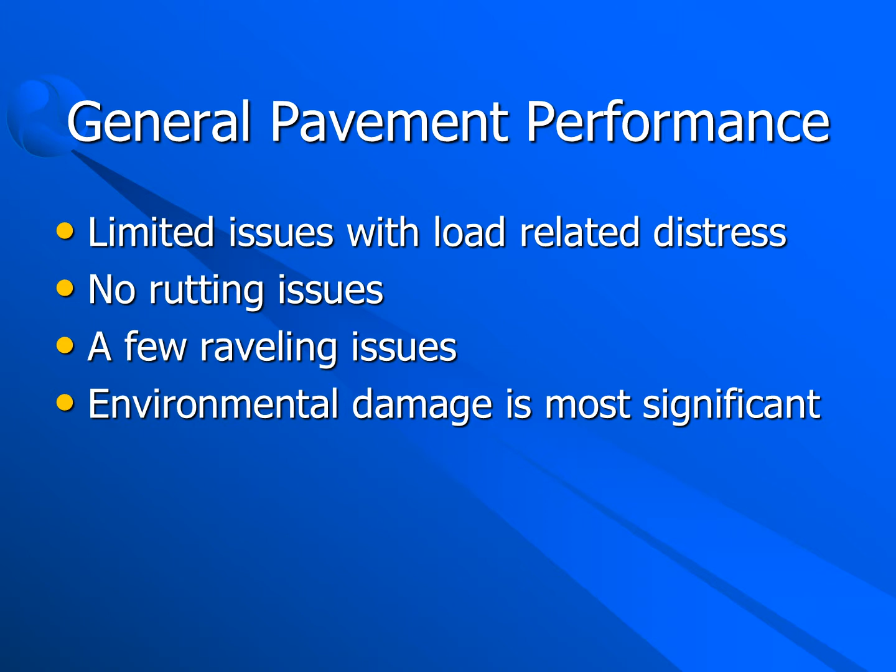So to give you a flavor of what our pavement structures would be, generally speaking, a thin lift of asphalt, 3 to 4 inches thick, over 8 to maybe 10 inches of base. That would be a pretty good pavement section for us. If we have to deal with frost heave, we'd have non-frost susceptible materials much deeper than that. But that would give you a little indication of the type of structures that we have.

So because my office covers a wide range of states, over the course of our performance with binder selection, we would try and match the binder system that is utilized in the state. So for example, if we were back in the 70s or 80s and selected a binder for Mount Rainier, Washington being an AR state, AR 4000 or AR 4000W would have been our typical binder selection, because we'd want to match what the local agencies had.

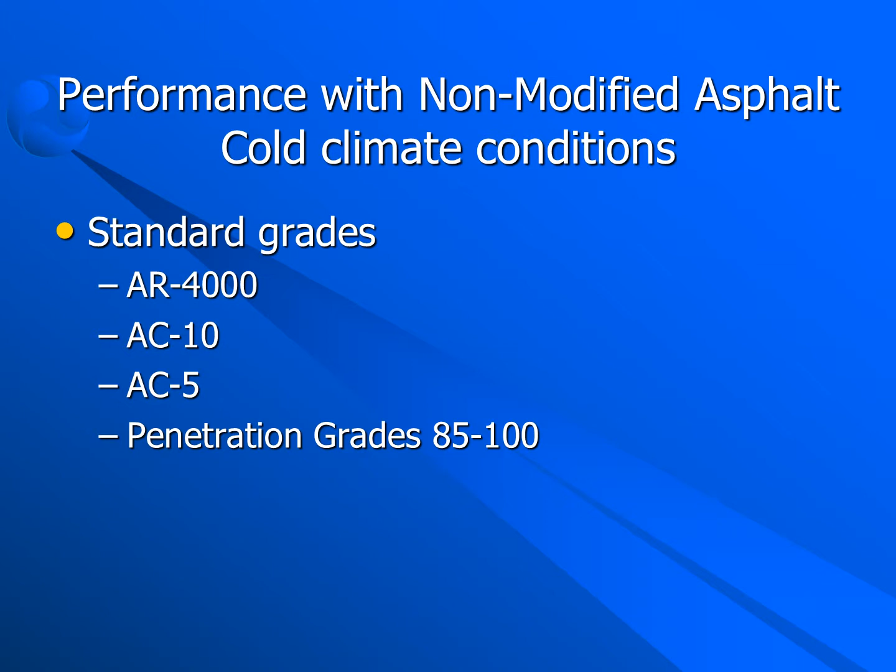So I'm just giving you kind of a rundown of the binders that we would have selected in some of our colder climates. AR 4000 and AC10, AC5 in our really cold climates, those would be what we would select. Montana was a penetration grade state, so 85-100 was a typical selection. We might have gone a little bit softer in some isolated instances, but these would have been our workhorses. So let's take a look at how they performed as recently as the late 80s.

The reason why we got involved, this actually had access to the Ochoco National Forest, so that's why we were involved.

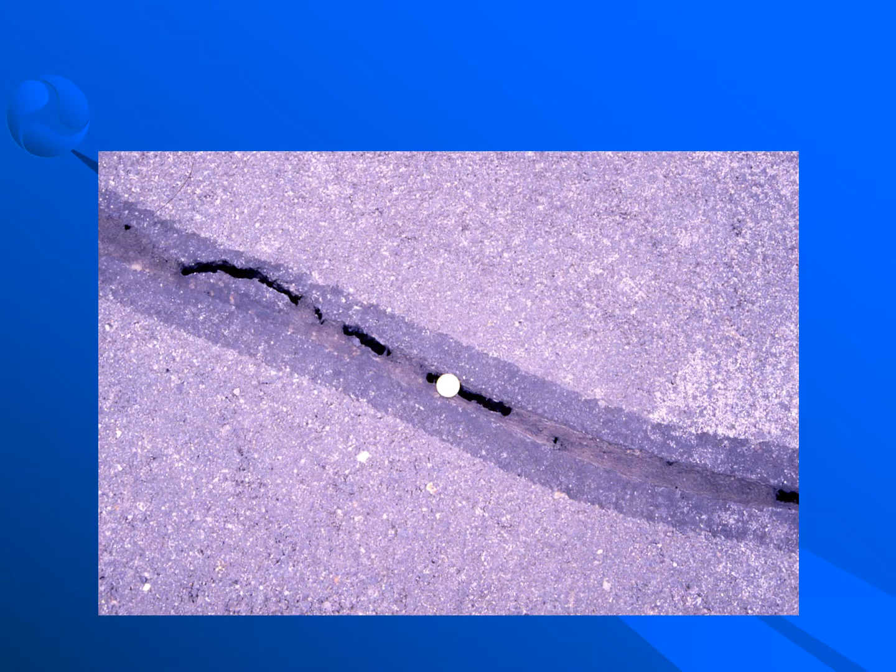And so this is how we would see the crack initiation from a thermal cracking standpoint, then environmentally drives the performance of the pavement. This would lead us to water infiltration, obviously occurring at the crack location, could lead to frost heave issues around the cracks, which would lead to faulting of the cracks, more breaking of the pavement, those kind of things. So that's why I say environmental conditions would primarily be our driver.

So that gave us kind of just one project, but general history back in the 70s, 80s, that's what we would see. So our history of modified binder use really started in the late 80s. Charlie talked about Nevada using AC20R. That was one of our first modified binders, was an AC20R. It was used on selected projects. So we selected it on projects in Yellowstone National Park, Glacier National Park, Grand Teton National Park, very specific for looking for pavement performance, because it was really unknown to us as what to expect.

In the early 90s, we went to a PBA system that was from the West Coast User Producer Group. Joe Duvall talked a little bit about that this morning. And so the PBA system was a performance-based asphalt. It was the precursor to the SHRP and Superpave days, but it looked at binders that would then be used for specific environments. And so we used PBA 6A based on those specifications.

We had a small nuance. That's where the little A came from. In the Pacific Coast Conference, the binder was actually graded as a PBA 6. And currently we use PG binders, very similar to what the gentleman from Minnesota was just talking about. PG 58-40s and 58-34s are prime selectors for our cold climates.

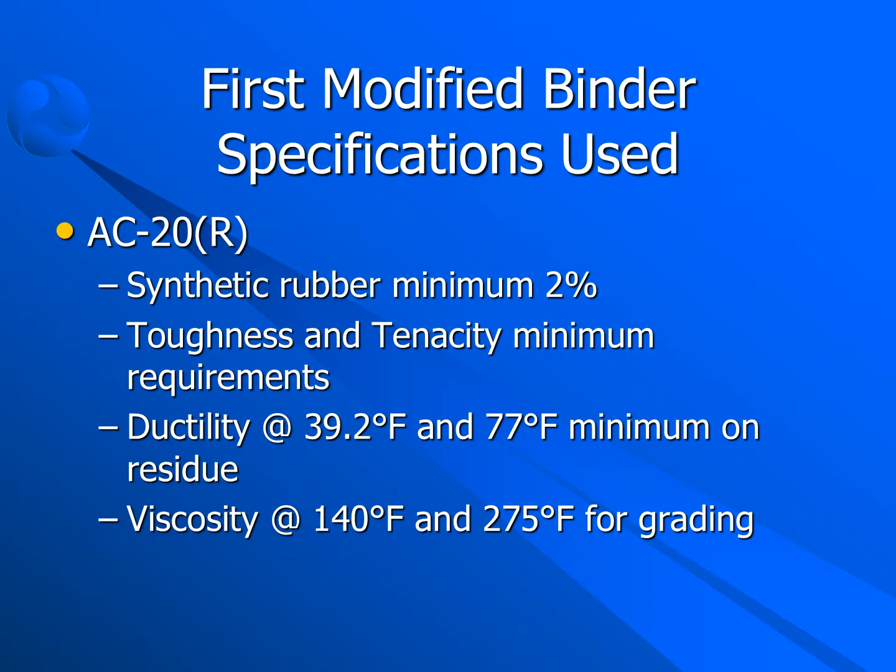So first modified use, just a general indication of where that specification was. I'm not going to go through the gory details of it, but synthetic rubber, 2% minimum. It had toughness and tenacity minimum requirements, a cold temperature ductility, and then viscosities at 140 and 275 for the grading purposes. That was kind of the basis for the AC20R spec.

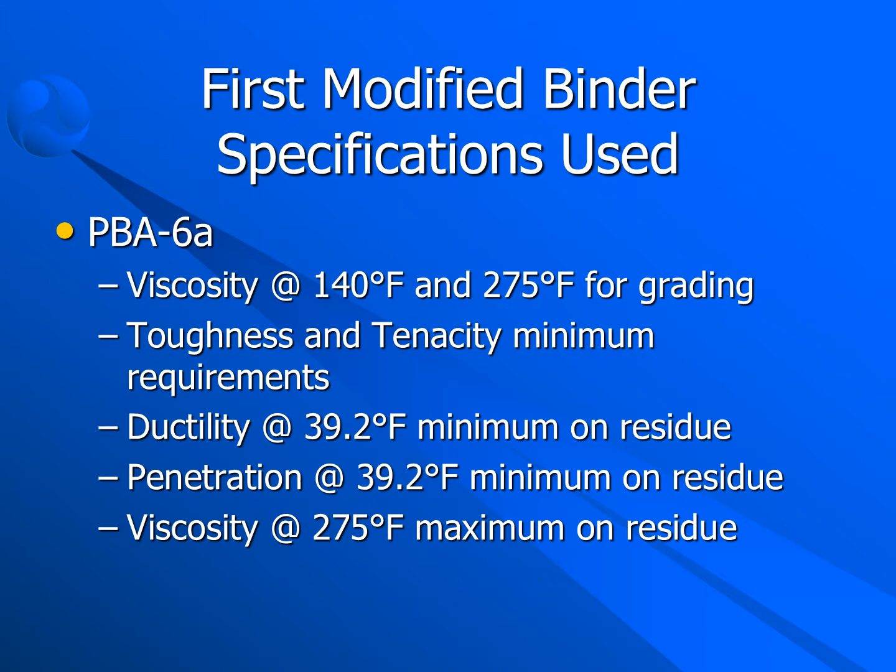Just to give a comparison to our PBA 6A spec. Very similar toughness and tenacity requirements for minimum, cold temperature ductility, but the added nuance that really came out of the Pacific Coast Conference was the cold temperature pen. And not to get into too much detail here, but that also led into other discussions within the Pacific Coast, just in regard to the cold temperature penetration testing, the repeatability and reproducibility of the test. But I would say still effective in getting us softer binders, modified binders that improved our performance.

So let's take a look at some of that performance. West entrance of Yellowstone National Park, it was a PBA 6A modified asphalt, average low temperature, again, off of LTPPBind of almost minus 39, minimum temperature minus 45. So again, very similar to the gentleman from Minnesota discussing the cold temperatures in the northern Minnesota range. We see those as well in our national parks in these colder climates. This was paved in 1993.

Just a quick snapshot for those of you who don't know where the park is. It's up in the northwest corner of the state of Wyoming, so we have the borders of Montana and Idaho right with us there. Yellowstone National Park and Grand Teton National Park are tucked up in that corner.

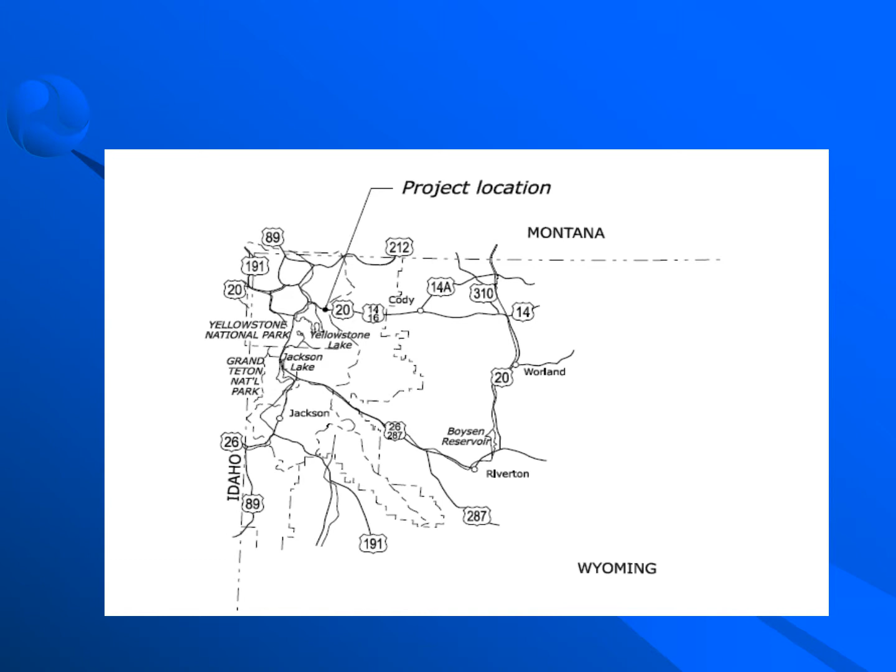And so I would say that the maintenance organization for this would be Yellowstone National Park themselves. They have a maintenance crew. They would be the ones that would take over the maintenance responsibilities after we would construct it. So not severe enough that they've even crack sealed. Again, just good uniform pavement. We saw great performance using this modified binder.

They've done some chip sealing on it. They've done some crack sealing on it. Still performing very, very well. And again, I attribute part of that to material selection in the mix design process, but also the selection of a modified binder for it.

This project was the one that really pointed us to the use of modified binders and how that works in regard to environmental damage. This was East Side Highway in Grand Teton National Park. For those of you familiar, if you ever had the opportunity to go there or go skiing maybe outside of Jackson, Wyoming, if you fly into the Jackson Airport and head out of the airport, the first road you hit, that's the East Side Highway. You can either head south and go into Jackson, or head north and go up into the park. And as you head north up into the park, that's where this project is located,

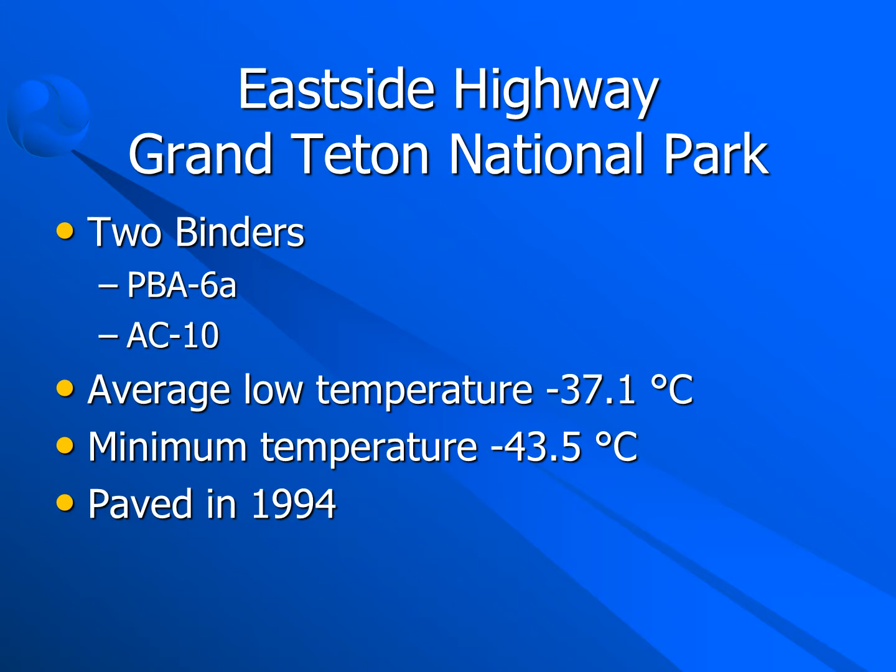not too far from the Jackson Airport. There were two binders placed side by side, a PBA 6A, same spec as before, as a modified binder, and an AC-10. You can see the low temperatures and minimum temperatures there again, paved in 1994. And this is what that project looked like that fall. So it was paved in the summer. This picture was taken in early October, after it was paved. The other thing I want to point out is you'll see a couple streaks in here on both sides. There was some segregation during the course of paving that just occurred as a construction defect. And I'll make note of those as we go into the next slide.

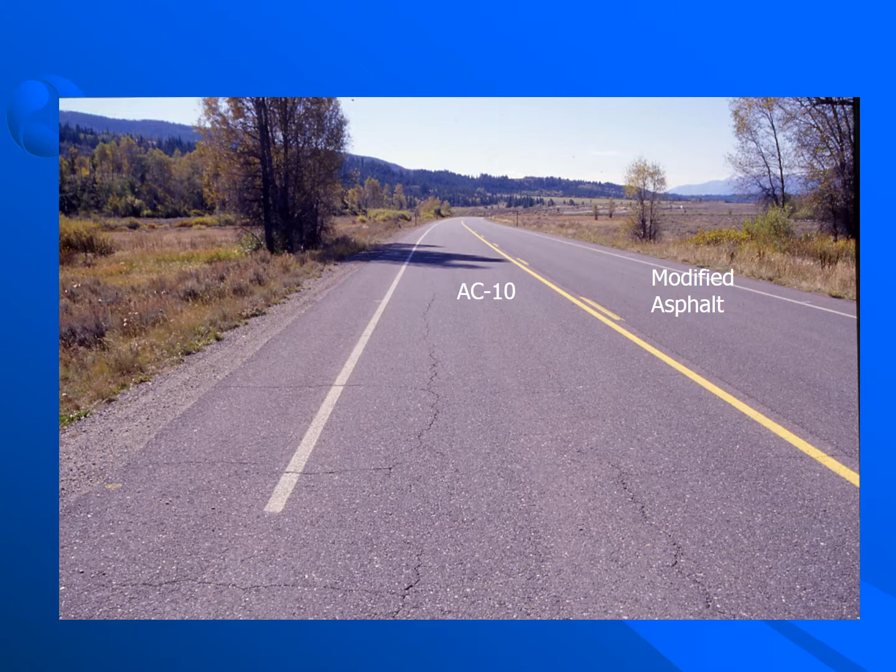Its condition after 2 years. So there's the AC-10 side and the modified asphalt side, the PBA 6A side. You can see the cracks along here, those were along the segregated areas. But more importantly, you'll see the thermal cracks that are already in the pavement 2 years after it was constructed. Another picture just shifting over and getting the modified asphalt side, the PBA 6A side, more in prominence in the picture. No thermal cracks, no longitudinal cracking in the segregated areas. Much better performance. Again, this is just from pavement review. So we could see we are getting good performance out of modified binders in our cold climates, and it enables us to have the stiffness that we need at the upper end.

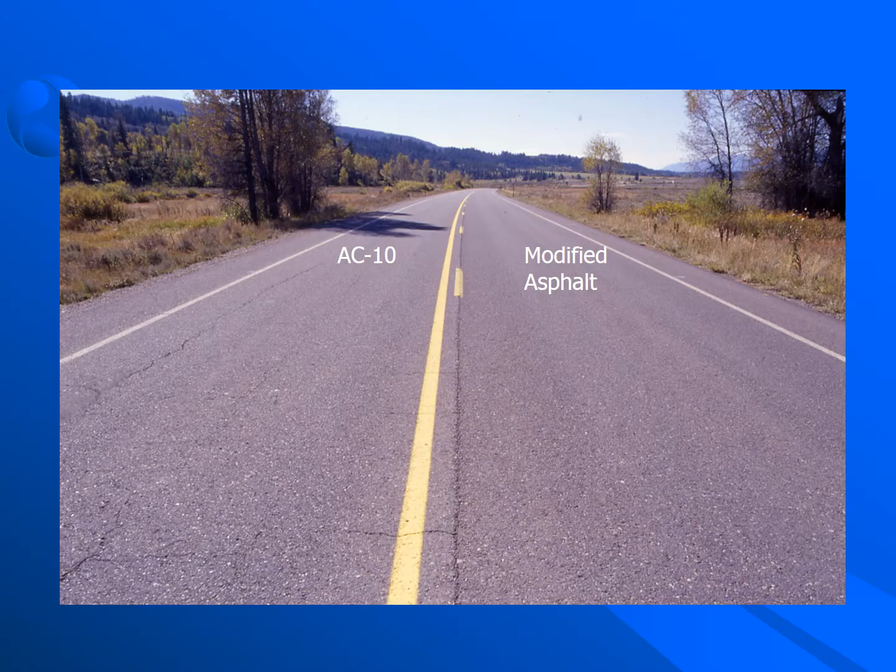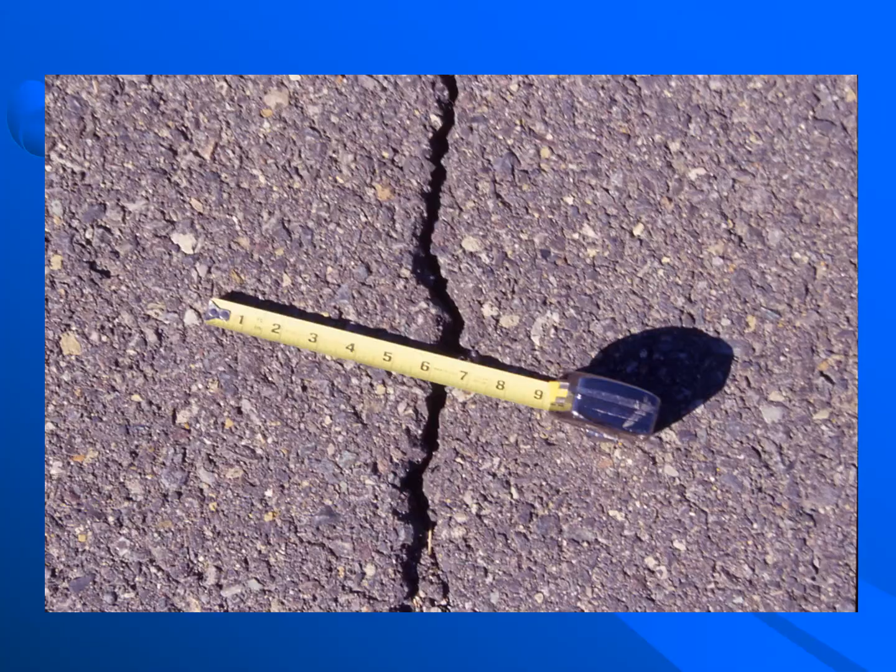A close-up of the width of those thermal cracks, again, after 2 years. So this is leading to infiltration, which will lead to other problems. Just as a side note, the lane that had AC-10, after around 10 years of service, was actually milled out and inlaid because of the severe cracking that was occurring. So again, not a very effective use of funds as far as pavement performance, and something we didn't see out of our modified binders.

So where are we at today? Today within Western Federal Lands, what do we utilize? We've utilized the PG binder specification since 1997. We are finding that the bending beam matches our thermal cracking performance. And what I've shown you so far was simply field reviews. We didn't have pavement management data to back that up with. These were simple field reviews where we would go out and look at pavement performance without actually having data to go with it. Since that time, we are able to monitor pavement performance by getting pavement management data on our national parks. So they go out and have a cycle in which we can get data.

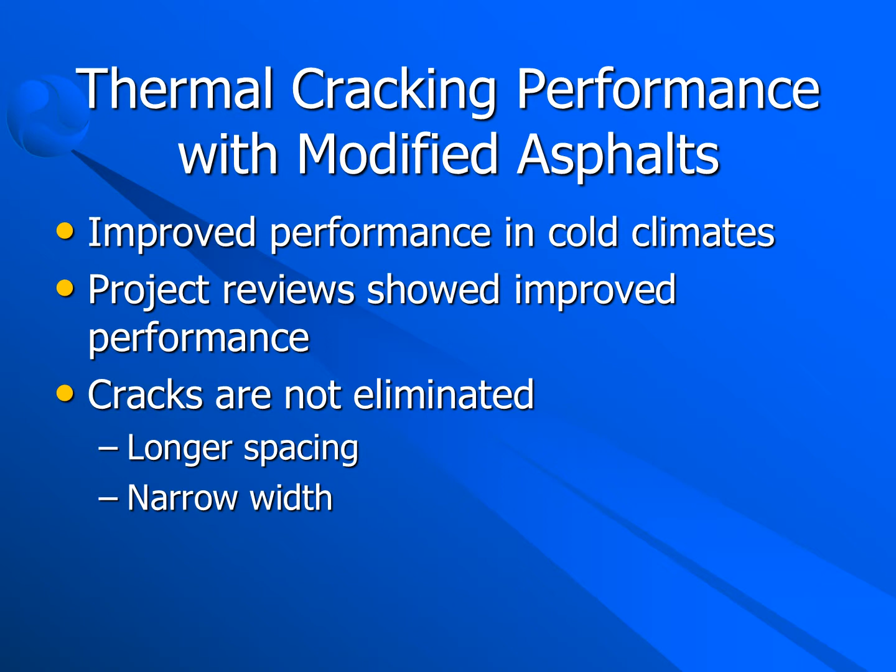So what have we seen? We've seen improved performance in our cold climates. Our project reviews, when we go out and do the field reviews, are indicating that from the projects that didn't have modifieds to the ones that did in our cold climates, I would say our cracks aren't being eliminated, but they are longer in spacing, further apart, and narrower in width. I'll get to why I think that's important, especially as we go forward.

So, what about the performance data that we're getting from our pavement management system? We obtain pavement performance data. Federal Lands actually does this as a service to the National Park Service. We have a crew that goes out and tours the whole country. It's on a cycle basis. Roughly every 4 years, data is collected from a specific national park. And we get typical data that a lot of you states get as well: rutting information, fatigue cracking information, transverse cracking, and ride.

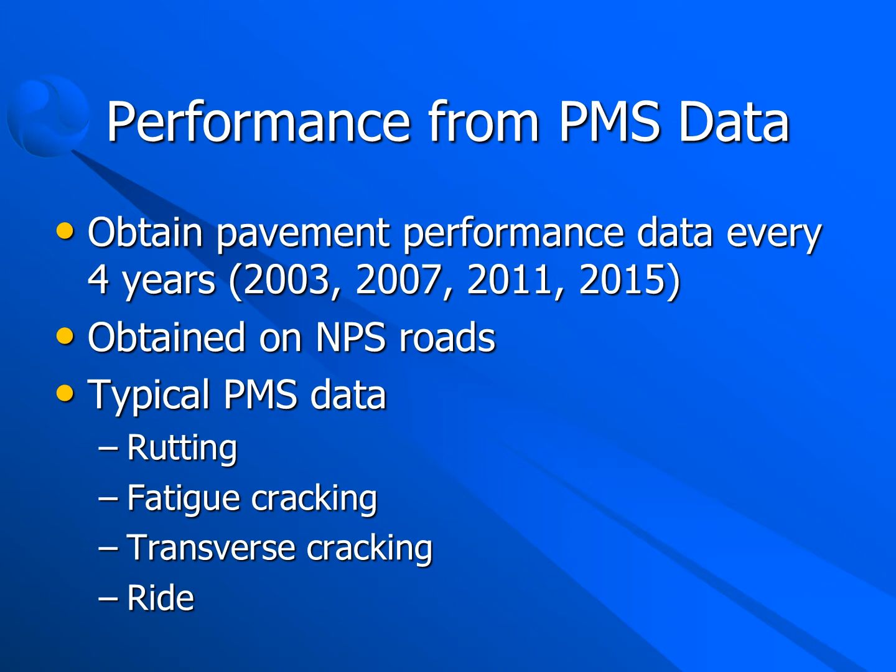So in relation to the pavement criteria, the ride and the cracking go together and form a pavement condition rating. And so this is what that rating is. You know, very simple, 0 to 100. All those factors go together in determining what the pavement condition is.

Again, just like in good pavement management practice, we want to keep the pavement in as good a condition as we can, keeping it in preventive maintenance mode as opposed to letting it fall into the reconstruction mode. So that just gives you the scale for the data that I'm going to show you.

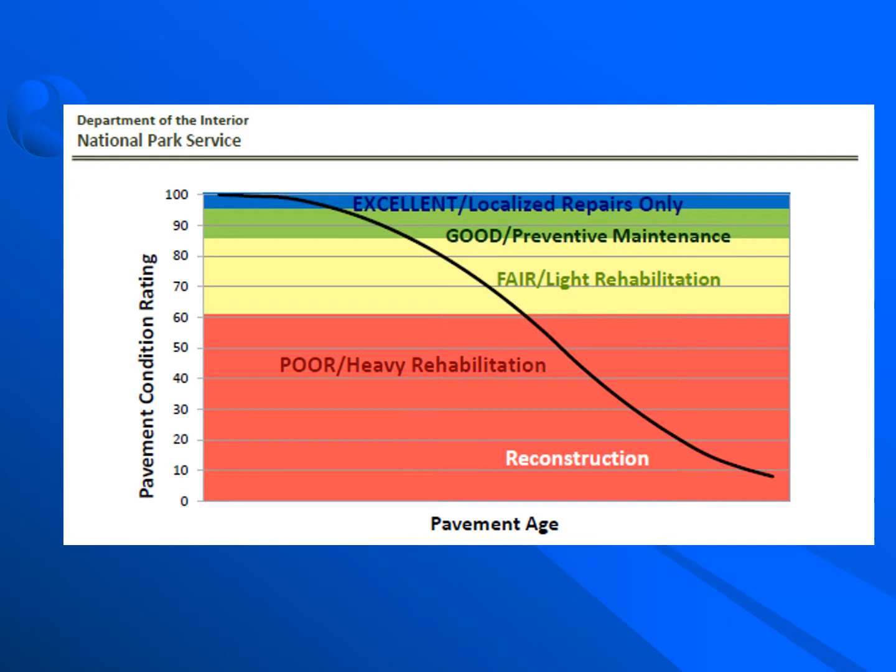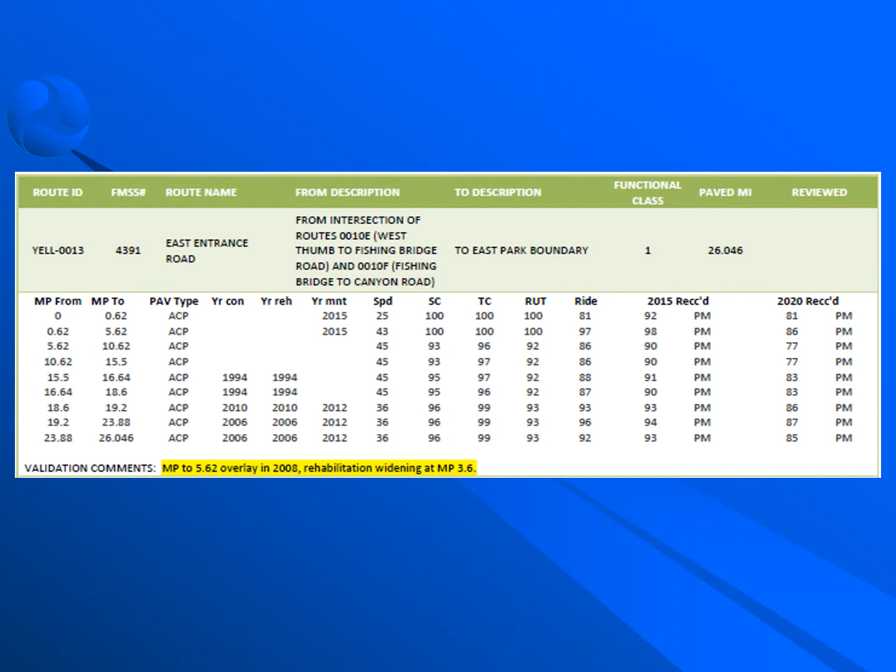So this is taken off of East Entrance Road in Yellowstone National Park. What I'm going to do is just narrow in on one section of this slide because I realize you can't see the data. So I just zoomed in on a part of that. So what you see is the year at which it was constructed. The segment that I really wanted to point to was constructed in 2006. It had a year of maintenance. So the park went out there and did some maintenance on it in 2012.

SPD, that column is speed, so they just monitor the average speed of the section. SC is structural cracking, so that would be all the fatigue type cracking that is associated with the pavement management collection. The TC is transverse cracking. So constructed in 2006, in 2012 after one maintenance cycle, and now this data was collected in 2015. 9 years later, our transverse cracking index is 99.

So the pavement management data is actually showing we are being effective in reducing thermal cracking, and that is really what is driving our use of modified asphalts. And again, I won't say that we necessarily pick modified asphalts, but the PG binders that we are selecting based on our environment are modified, and because they're modified, we're seeing that thermal cracking resistance and that improvement.

And so what does that mean just in general summaries? I kind of have concluding remarks. One of the things I didn't present in some of my data that I wish I would have, we have done some TSRST testing on specimens and mixtures taken from these projects. So we do have the thermal cracking, the critical cracking temperatures, again matching very well with the environmental conditions that we're seeing. Like Joe Duvall mentioned this morning and some of the things that WashDOT is doing, we're doing the same things in regard to the creep recovery test.